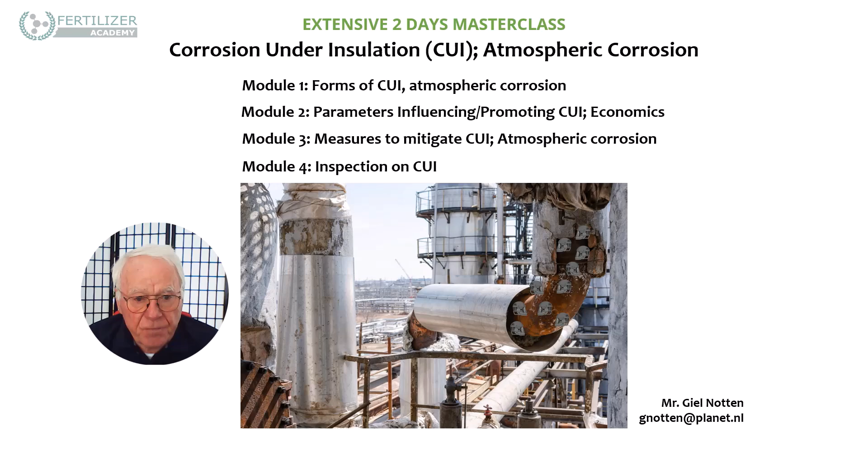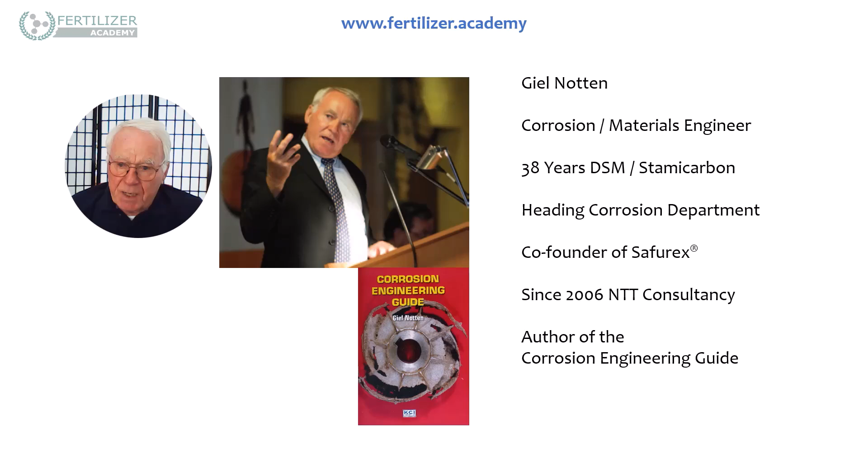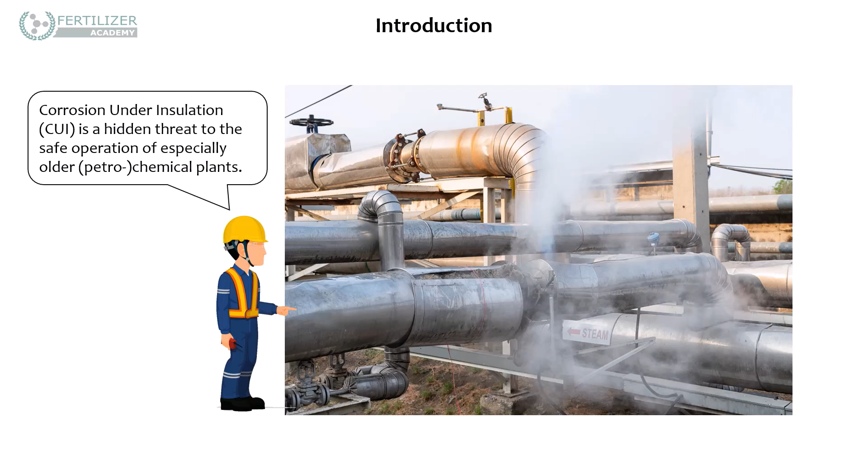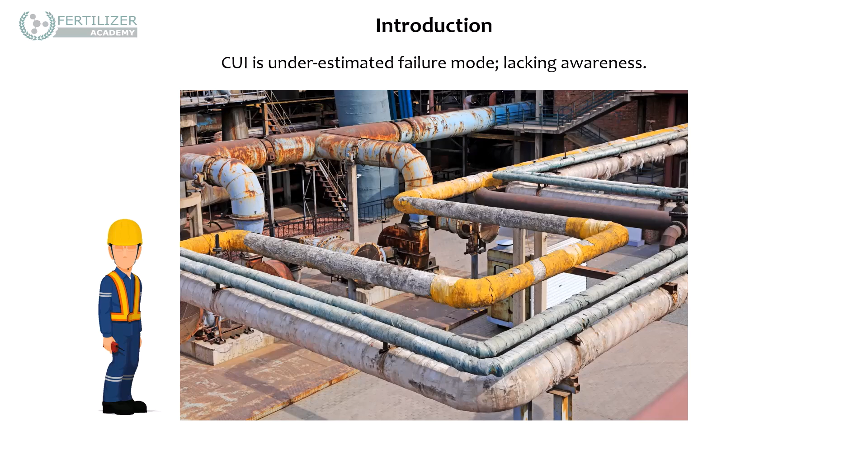In advance we can already make a statement: corrosion under insulation was, and in some chemical industries still is, an underestimated failure mode. There is still in a lot of instances a lacking awareness. People don't want to hear about corrosion under insulation, don't want to see corrosion under insulation, and don't want to speak about corrosion under insulation. It was a wrong choice of adequate insulation and coating system.

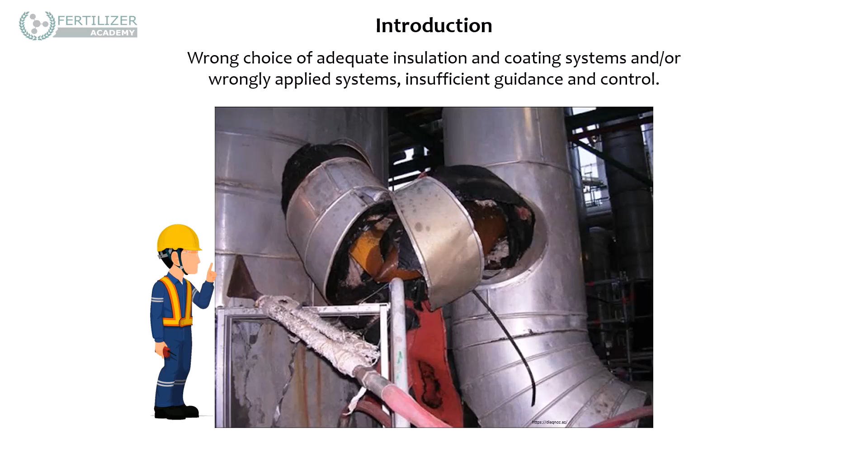Penetration of moisture is possible due to defects.

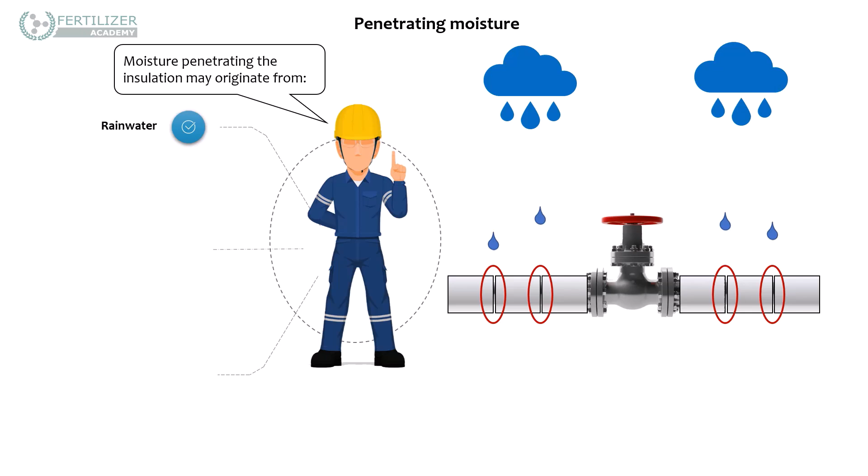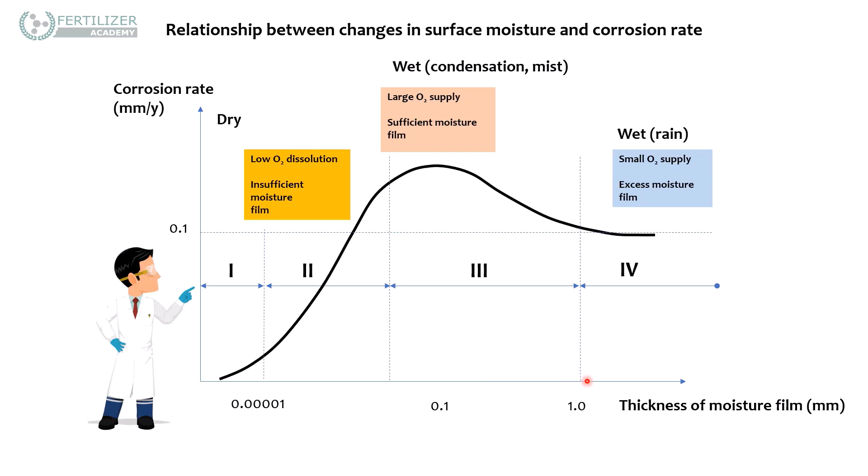It shows a relationship between the corrosion rate and the thickness of the moisture film, a critical location where this serious corrosion did occur.

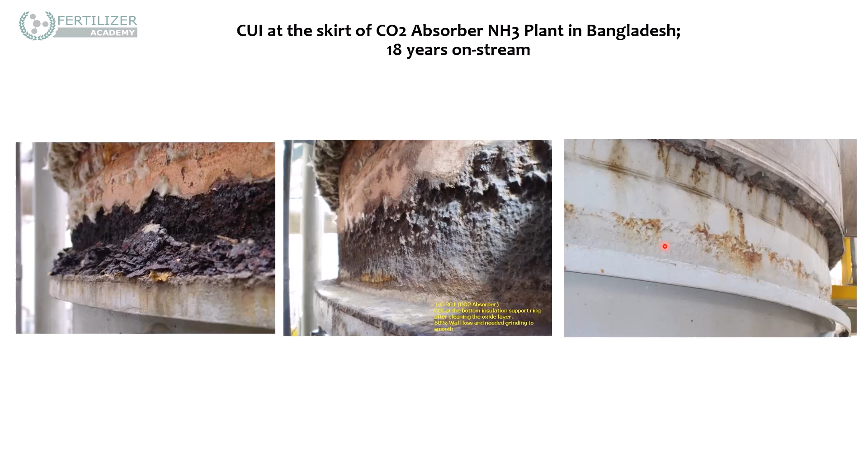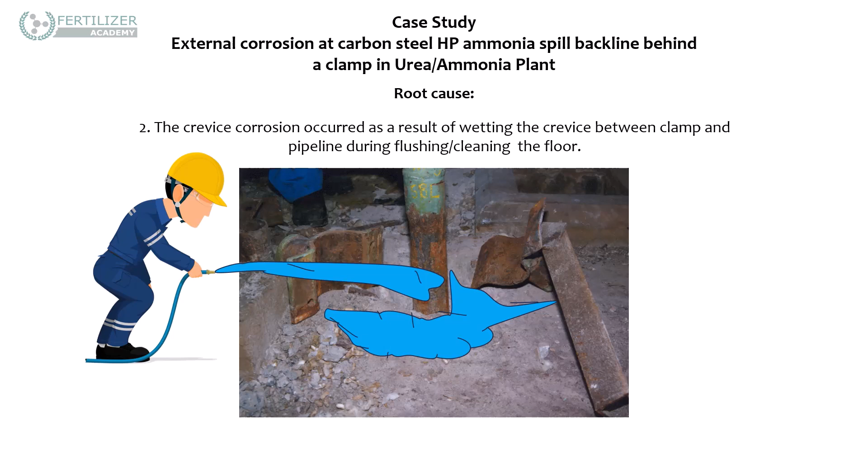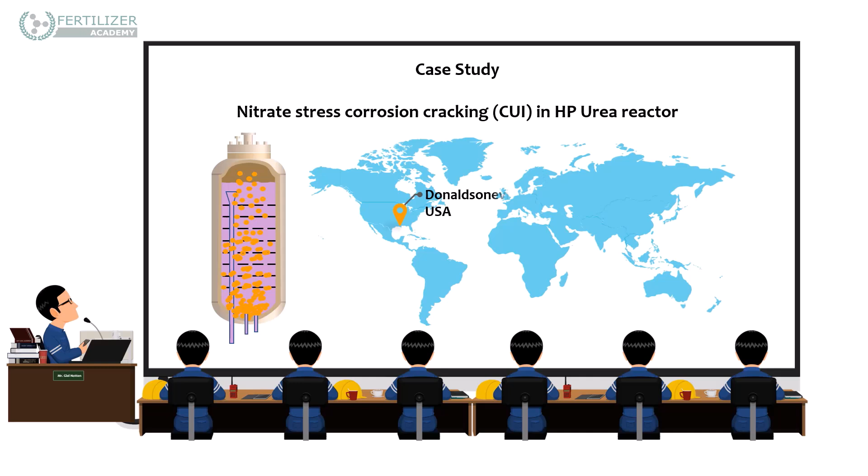The rupture caused an explosion, followed by a big fire. Within a minute, about 40 tons of cyclohexane leaked from the pipe.

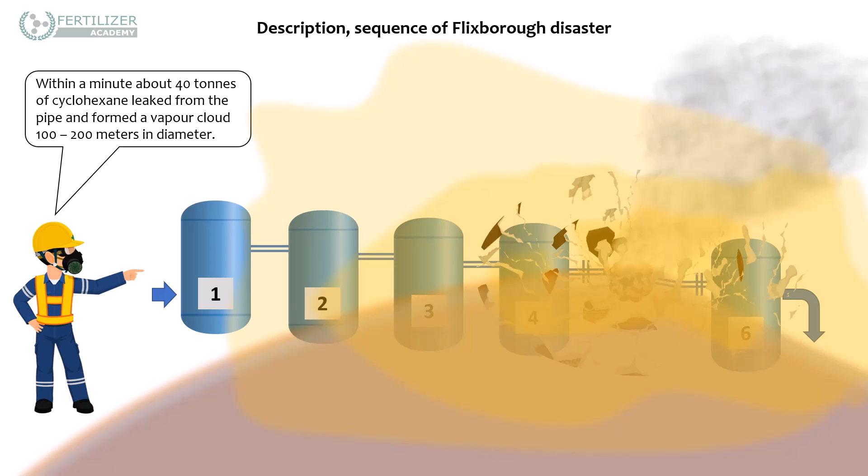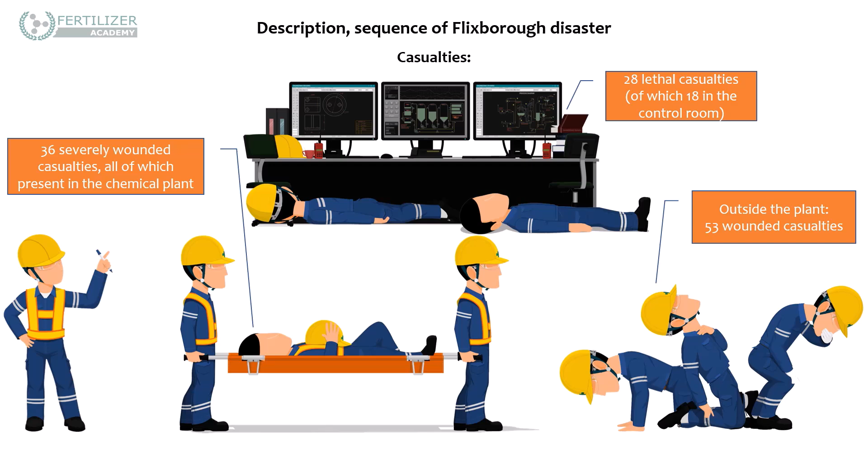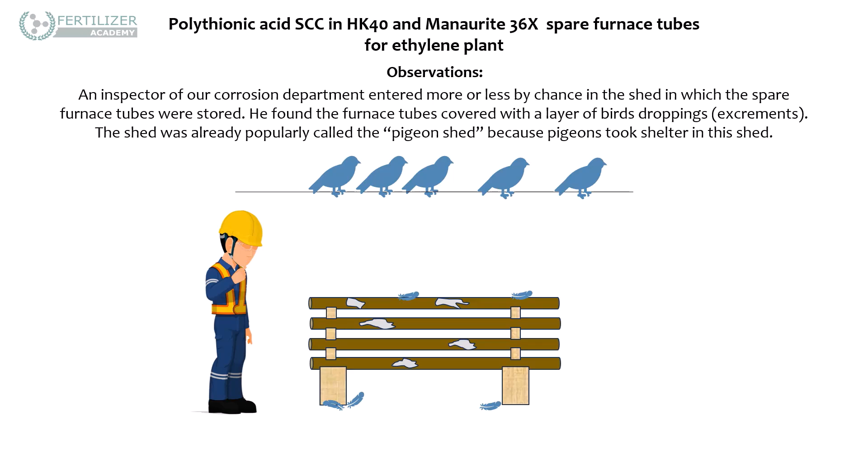What have been the consequences of this? And chloride containing rainwater. And what were the observations? Because the inspector of our...

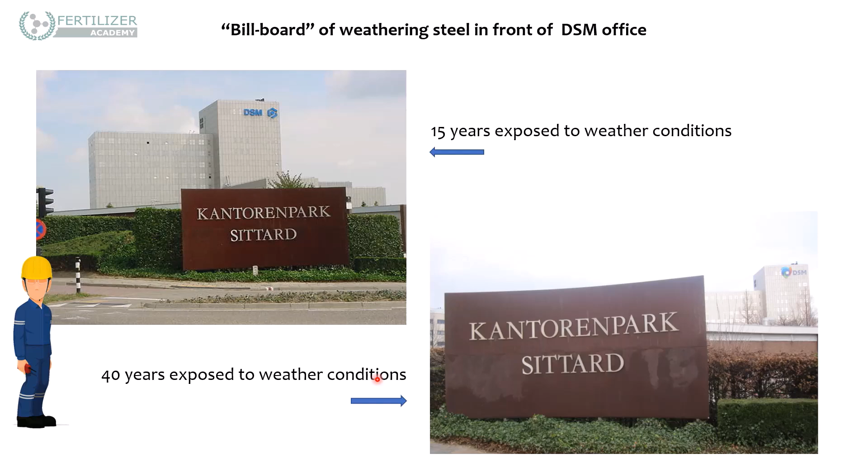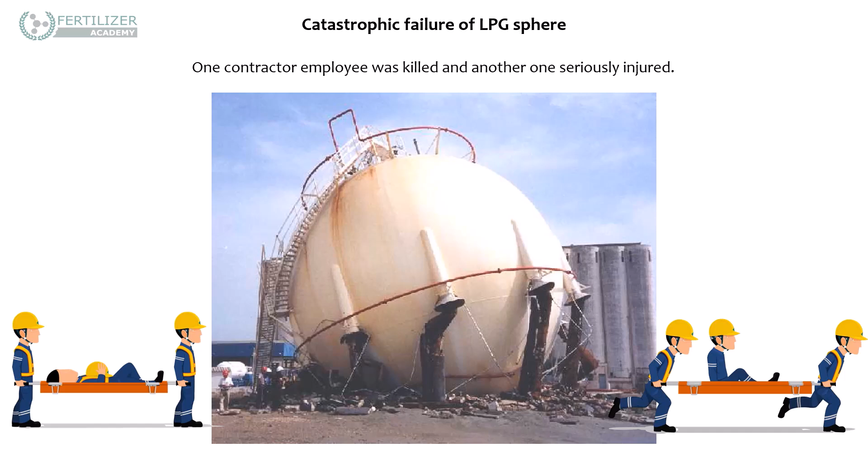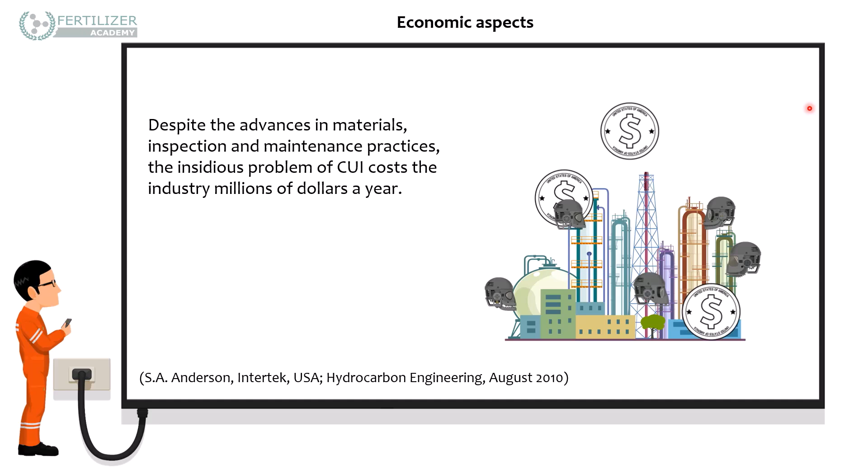Despite the advances in materials, inspection and maintenance practices, the insidious problem of corrosion under insulation costs the industry millions of dollars a year. The total cost of replacing did rise up to $3 million.

However, a cut in inspection and maintenance costs regarding corrosion under insulation should never be to the detriment of safety, health and environment aspects.

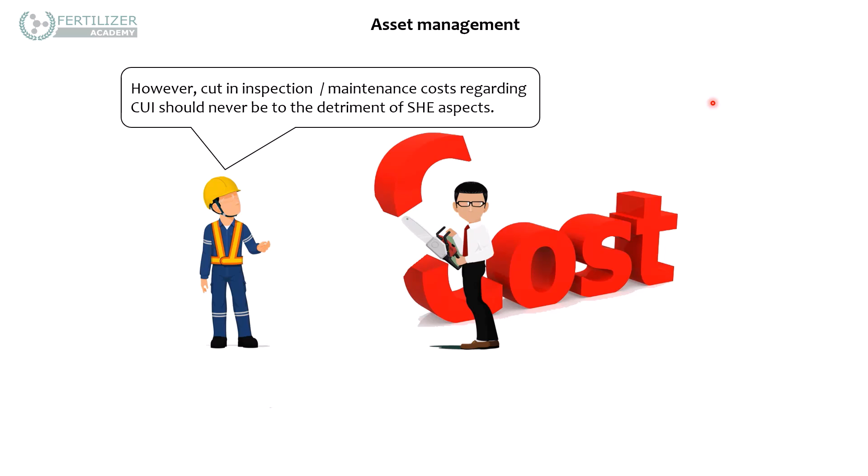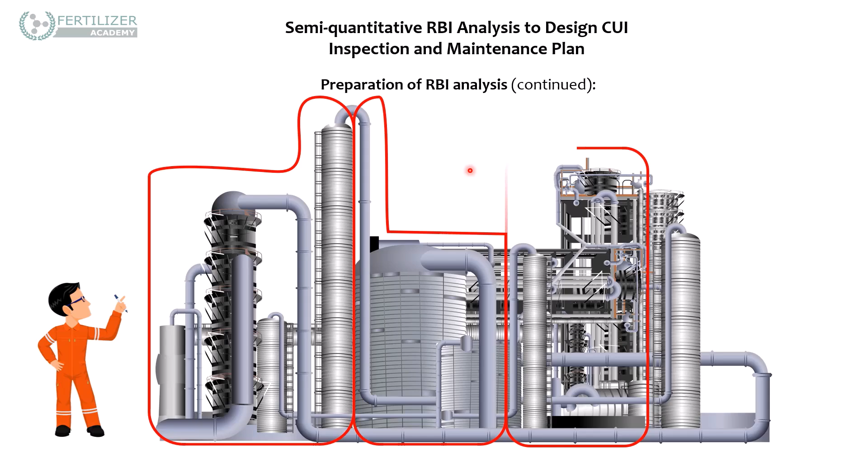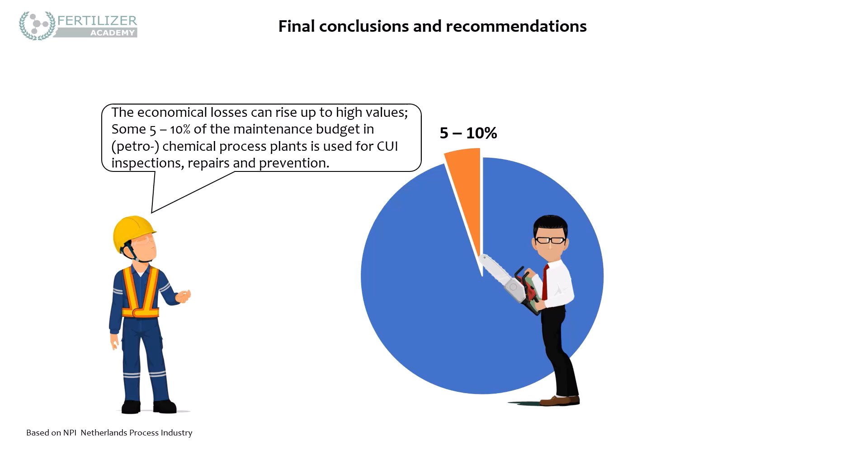The economical losses can rise up to high values. Some 5 to 10% of the maintenance budget in petrochemical and chemical process plants is used for corrosion under insulation inspections, repairs and prevention.